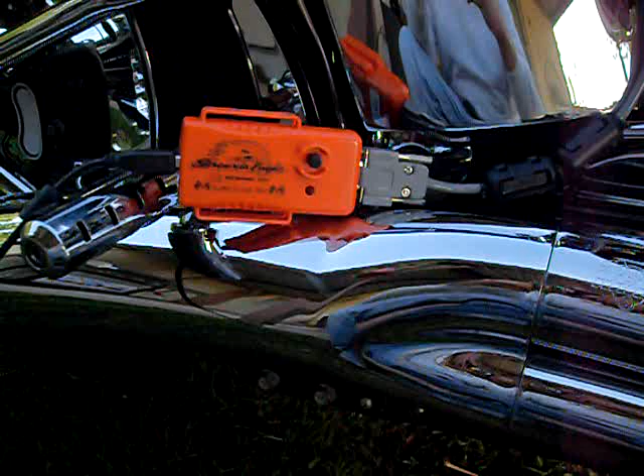Okay, I'm going to show you how to tune your Screamin Eagle Super Tuner Pro on the laptop. As you can see here, I've plugged it in under the seat, and there's a little plug right here that runs up under the seat. Just plug it in and you'll be ready to go. Then you just run it over to your laptop here.

Open up your Screamin software. Hit accept. Check for updates. And we're done. Exit. Then you want to go up here to this little icon here, setup, tuning.

Once you plug this thing into your bike, it's automatically married to your bike. So if you plan on getting another motorcycle, I wouldn't plug it in and practice with your first one, because it's a one-time, one bike only. Unlike the Power Commander, this marries to your bike.

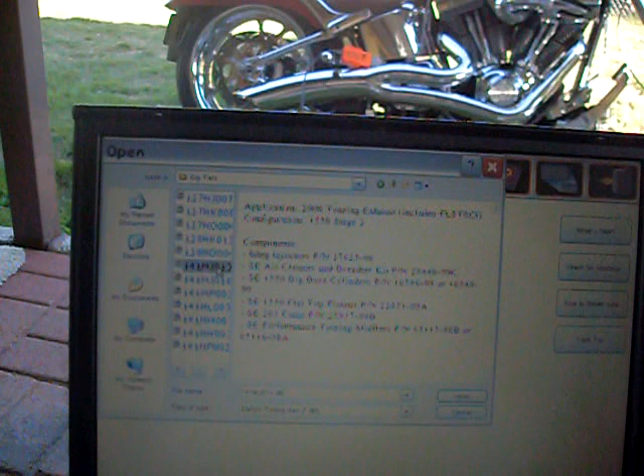And if you come in here, you'd want to go to manually select a file. That's what I had to do anyway. Go to Big Twin. I already know my year model, it's an 06 Deuce, 1550 stage 2. It doesn't have the heads. I had my heads ported, and I have 211 cams.

I couldn't find a map that was exactly what I had, so I went to the closest one I could find, which is, it'll tell you right here, this says 1550 Screamin with 6-degree injectors, 1550 big bore kit, flat top pistons, slip-on muffler. I chose the 1550

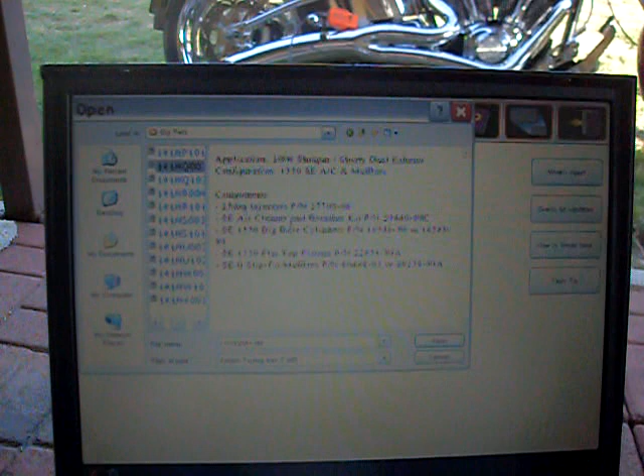25-degree injectors. If you don't know what injectors you have, you can look at the top of them and it'll have a part number. You can Google that part number and it'll tell you what degrees your injectors are. In 06 they came out with the 25-degree injectors about the 6th month. Luckily mine has them in there. I don't know if they were added later or I just got lucky.

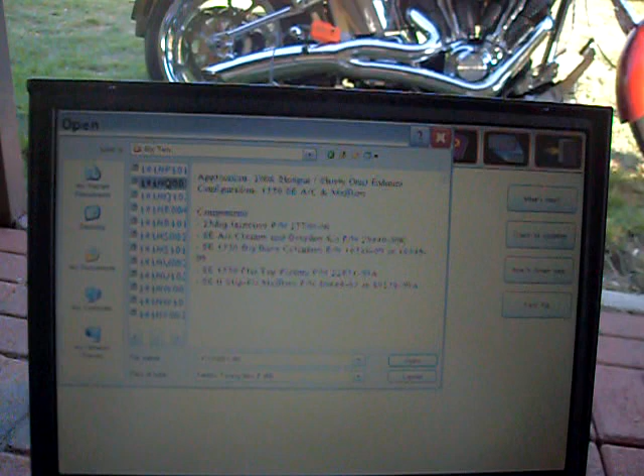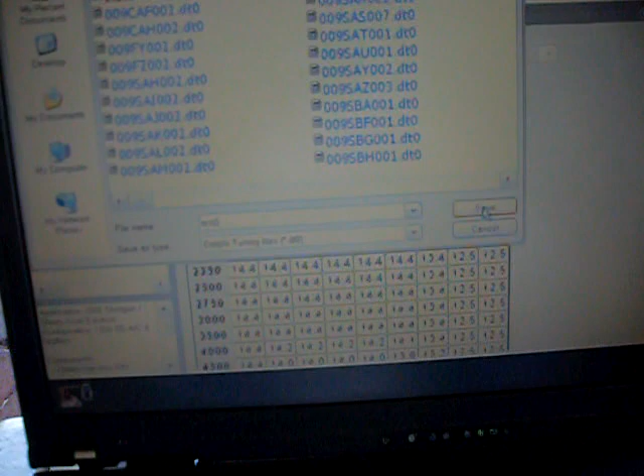So I'm going to start with this map here. Hit open. First you probably want to save it, so you don't save over the existing map. You click on the little arrows right there and it'll give you the option to save as. I'm going to name this one Test 2. I already have a test, so I'm going to do this as test 2 for the video. You hit save.

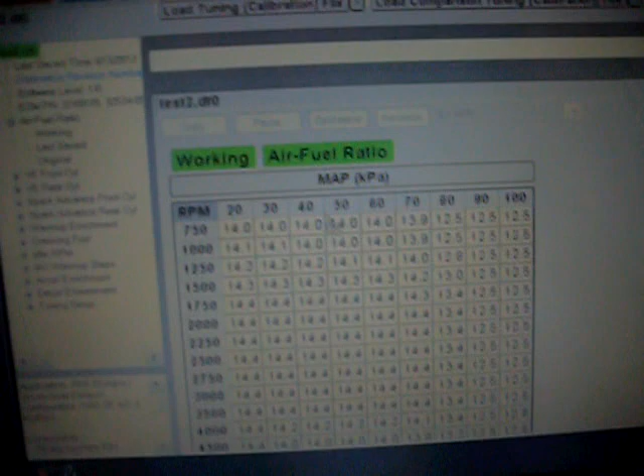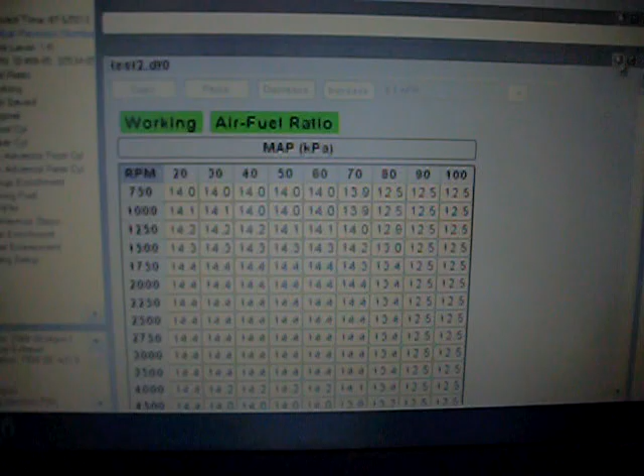Then you want to go to your air fuel ratio over here. Hit the plus. Your working is going to be the file that you're working on, which is up here now. It's called test 2. So you just left click, hold it down, and drag it over here and let your mouse button up, and it'll ask you to replace the current item with a table or with a graph. I'm going to choose a table. I'm going to expand this window so we can see it.

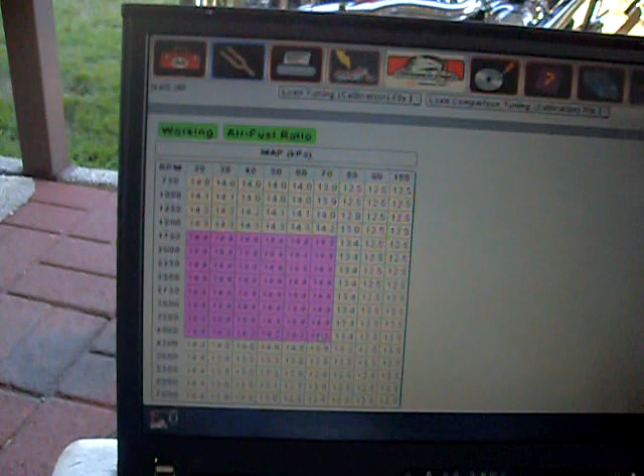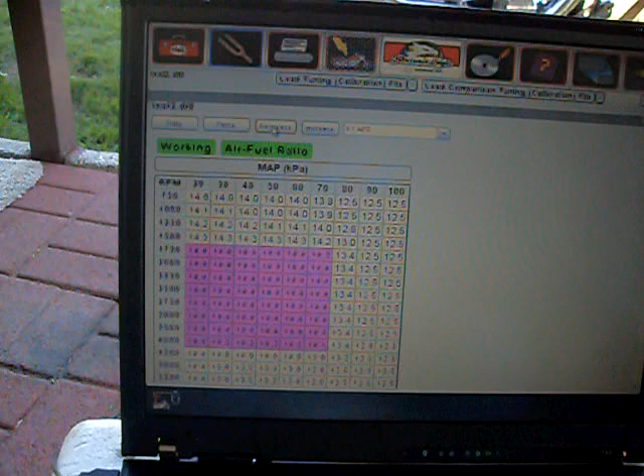To get more horsepower, you want less air and more gas. This map is showing to be kind of high in this range for air, so I'm going to select all my 14.4, 14.2 values. I want to decrease that. Right now it's giving me increments of 0.1, which is 1%, so I'm going to decrease it 5% to get around the 13.9 area. That's where you're going to get a lot of horsepower out of it. So we're going to go 1, 2, 3, 4, 5, and then click your save button, and you can exit out of this.

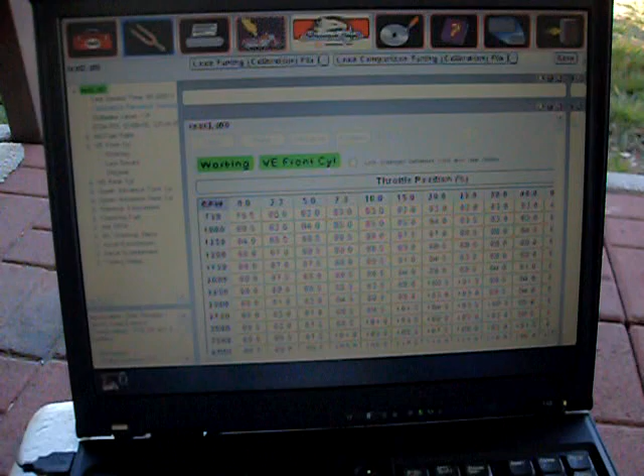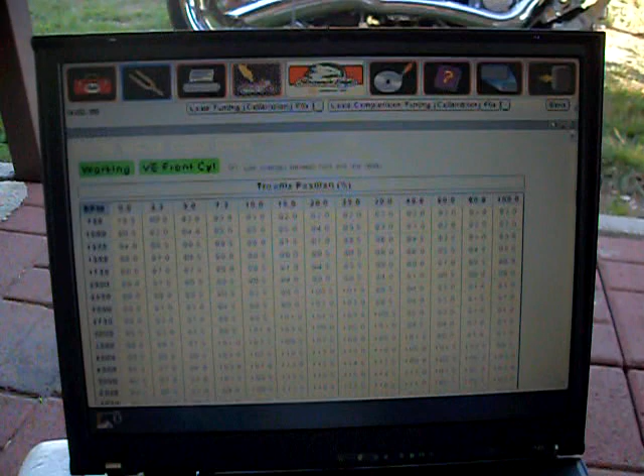Then your VE table, you do the same thing, working front cylinder, and this is going to be the amount of gas that you're giving your bike. You want to make sure you click on link changes between front and rear tables. That way changes you make here are going to be done to the rear cylinder. You don't want to change anything on the front that you don't do to the back, so they're running the same. And this shows your throttle position up here, 0 to 100% throttle position, and then your RPMs are over here.

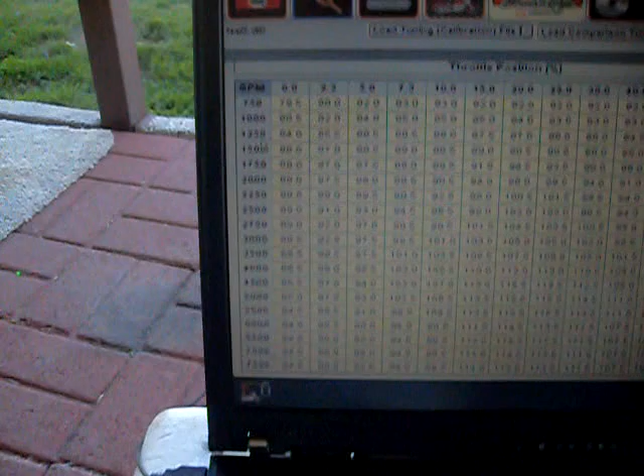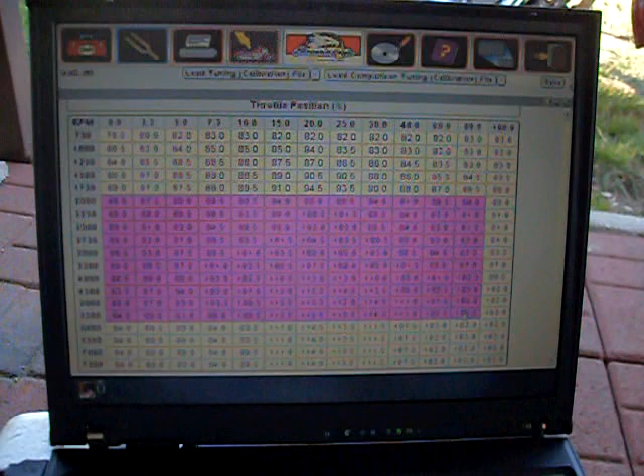Usually if I'm getting on it, I want to have a fast bike, I want to go in here and from about 2,000 RPMs to about 5,500, I just want to increase all this fuel area a little bit. I'm going to increase it 2%. It's at 0.5% right now, so let's go 1, 2, 3, 4.

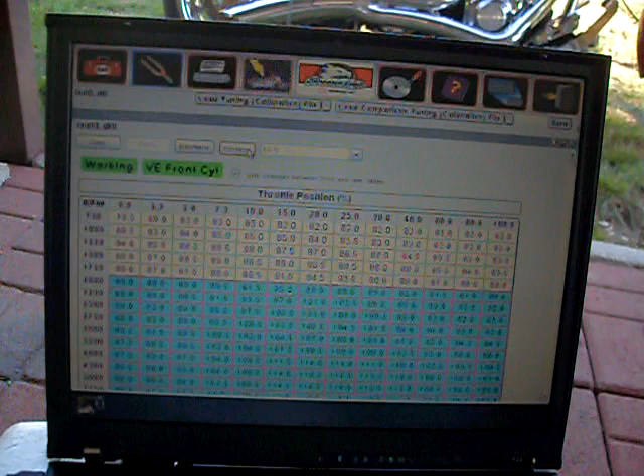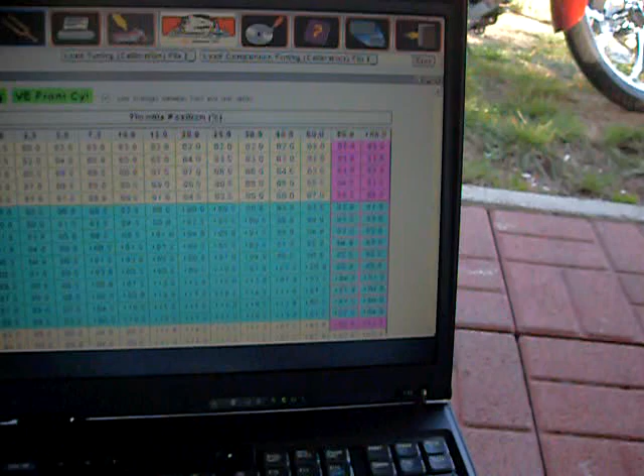And then I want to increase these two areas right here, the 80 to 100, all the way to 55. My rev limit's set at 6,200, but I don't ever hit the rev limit. I'm going to go ahead and increase these areas a little bit as well, so I'm going to go 1, 2, 3, 4, and that's going to give me more fuel at 80 to 100% open throttle. If I'm at that area, I know that I'm wanting more fuel.

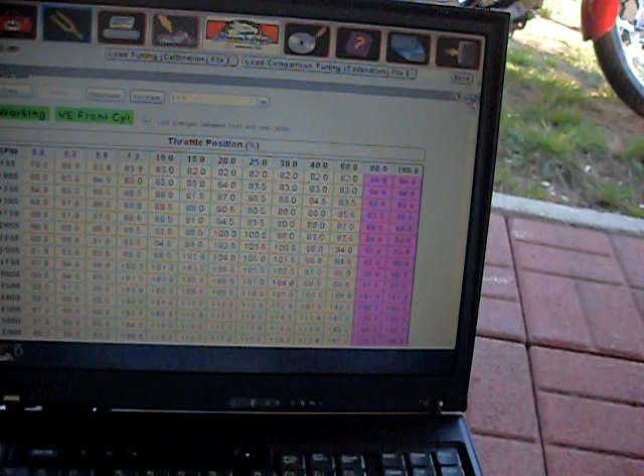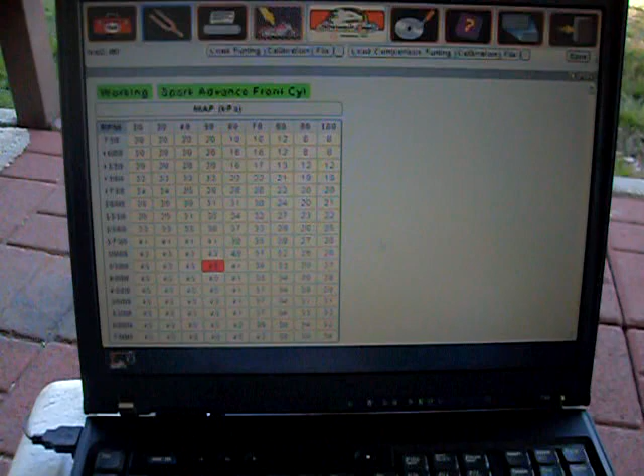So now we can save that file. That's automatically being saved in the test 2. So we know that the front and rear have already been done. Let's go to the Spark Advance. Working. This is going to change your timing. You can play around and find out what works best for you and your bike.

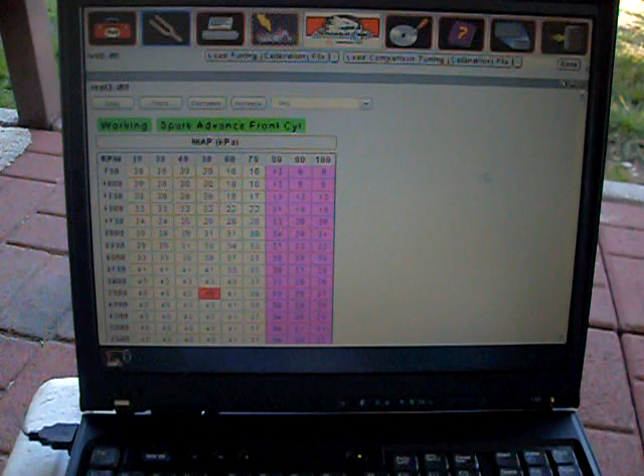Every bike is different, so you just need to change the settings in one area, save it, go do a test run, come back and go back to the original map, or change these back. Just remember what you changed, and if it doesn't work, then you can always go back and change it back if you go too far, and vice versa. So I'm going to decrease the timing 3 degrees. 1, 2, 3. Click save.

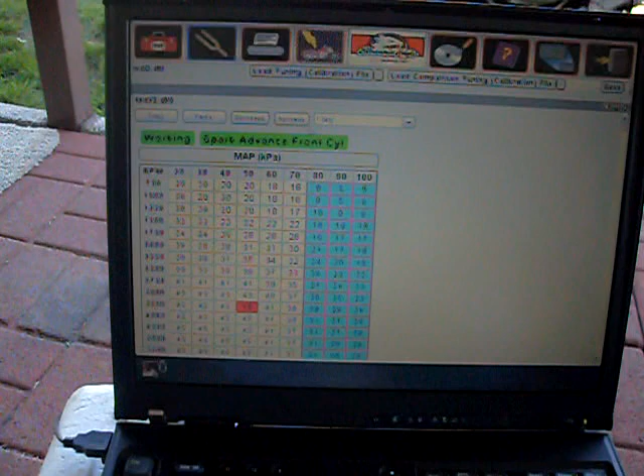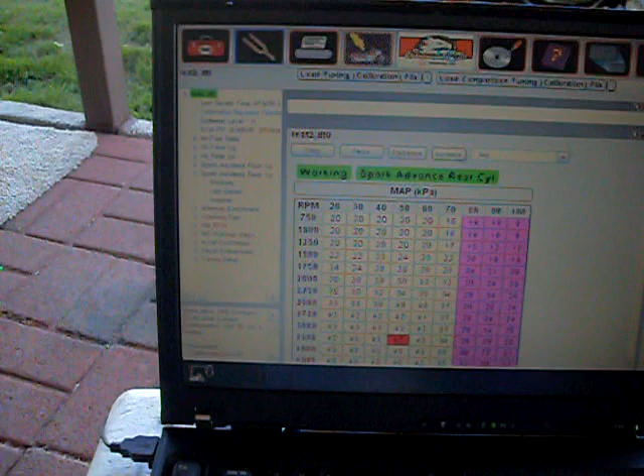Now that was my front cylinder, so I'm going to have to go to the rear cylinder and do the same thing. So let's grab these two areas. We're going to decrease these 3 degrees. Click save.

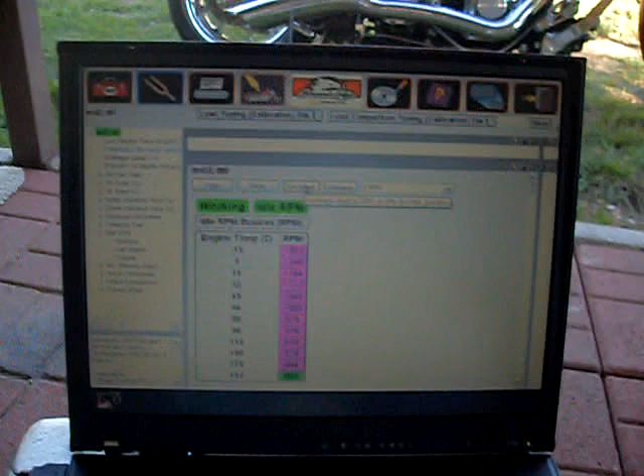Idling. You can change your idle speed right here. This is going to change basically your RPMs while you're idling. I want to decrease this about 20 to 30 RPMs less, so it gives it a nice lope. So I'm going to hit that 3, 4, save.

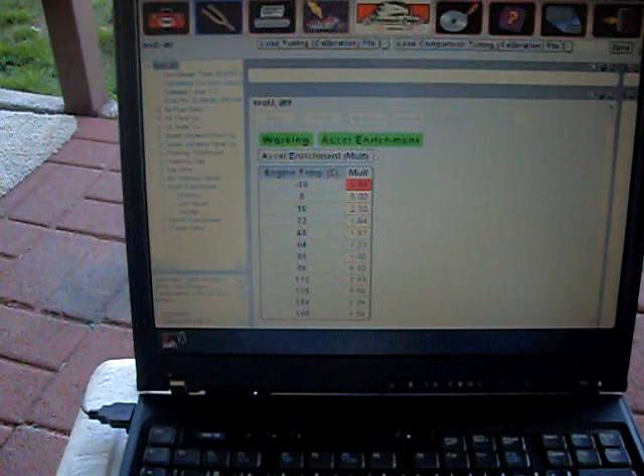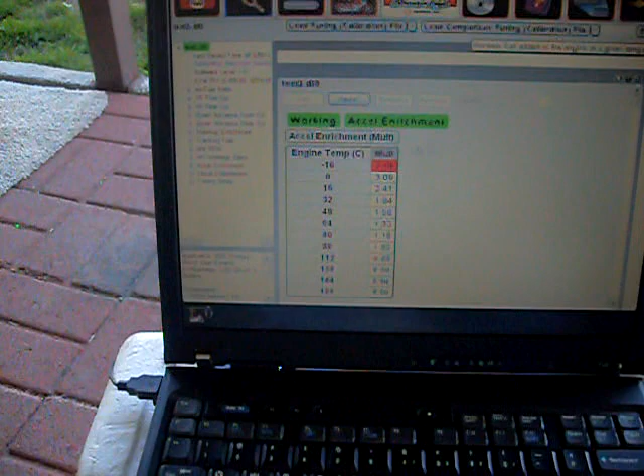X that out. Your accel enrichment, this is going to tell you how much gas you dump in when you mash the gas. So I want to increase all these, probably do about 5 increments of 0.02, which is 1, 2, 3, 4, 5. That's going to shoot gas into those cylinders whenever I mash the gas, and you want to have that for sure.

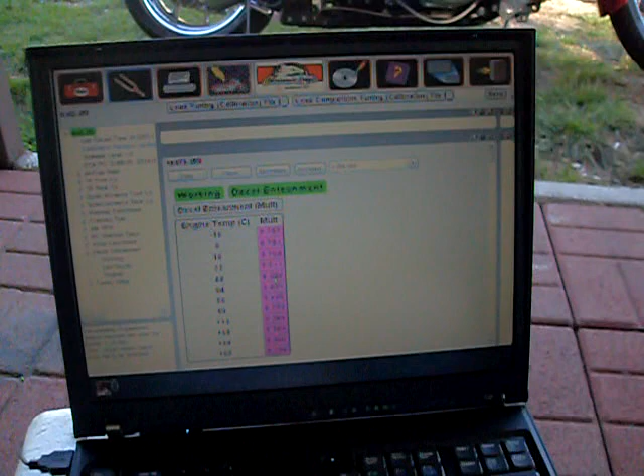And then my decel, it's going to be the exact opposite here. You're going to increase it to have less fuel when you let off the gas. So if you're getting some popping and stuff when you let off the gas, you probably want to come in here and increase these values to allow for less gas while you're decelling. So let's increase these by 3. 1, 2, 3. Click save.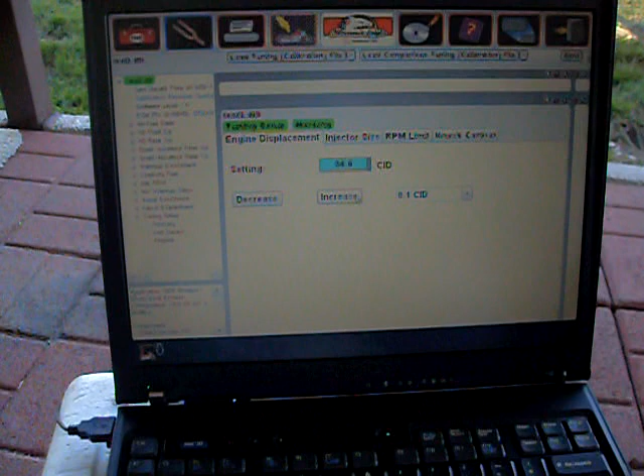Now you want to go to your tuning setup. Go to working. Right now it's showing my setting as a 94.6, which is wrong. I have a 95, so I want to change that to 95. My RPM limit, you can change that to whatever you want. 6200 is plenty for me right now, so I'm going to stay there. Turn your knock control on, it just helps to have that.

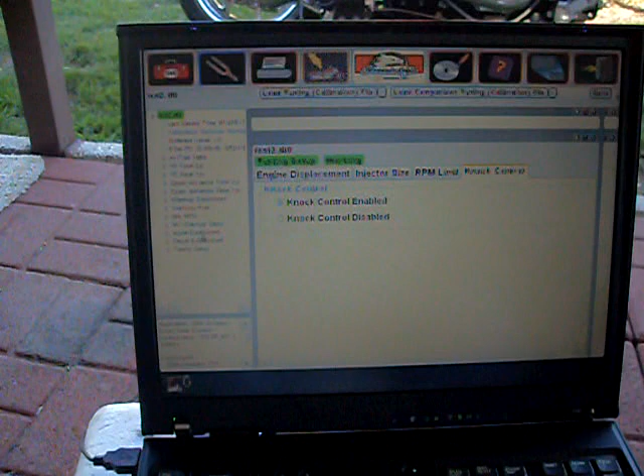So right now what we've done is we've come in here and we've changed our decel and accel enrichment. We've changed our idling. We've changed our timing. We've changed how much fuel we're getting per front and rear cylinder. And we've changed our air-fuel ratio. So now it's time to load this information into the bike.

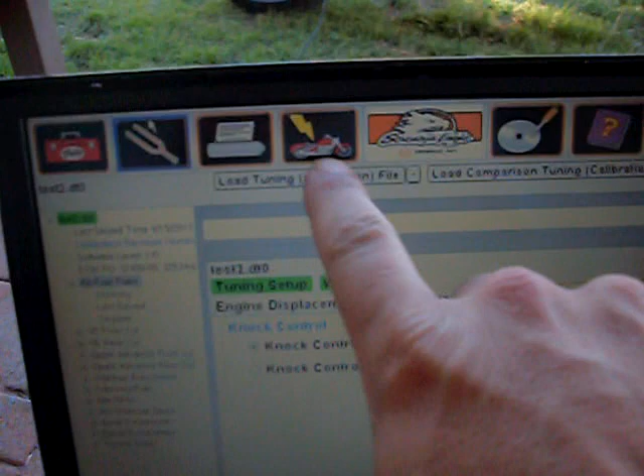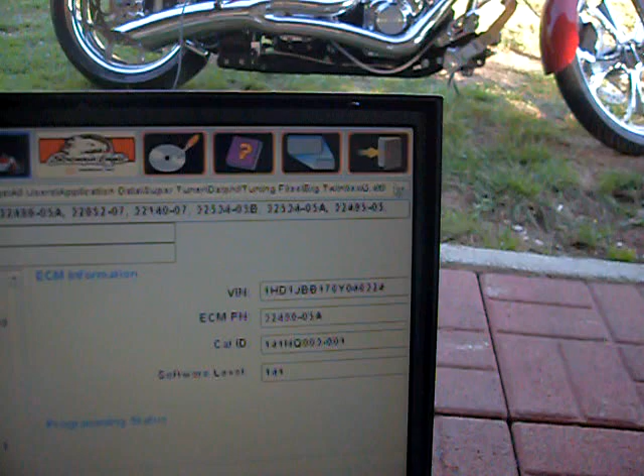So you come over and turn the key on. Then that little icon right there, the mask will be taken off of it, so to speak. And right here it's just giving you this real long name, but at the end of it you can see it says test 2. That's the one I've just been working on. You can use your drop down arrow to get a better idea. If you're not sure, you can select it again down here.

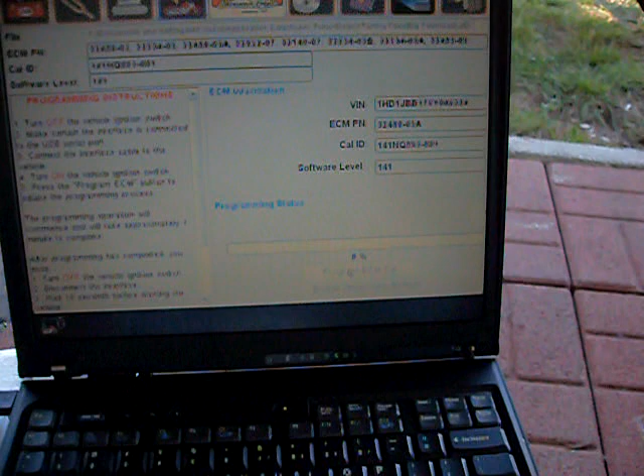And then you want to hit program ECM. What it's doing is sending it to the computer right now. You can actually hear it changing in there. You can see it's calibrating the vehicle.

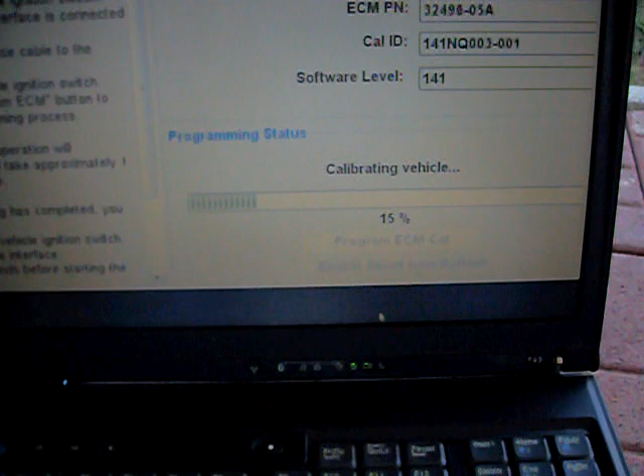Once you've done this, you turn the bike off, unplug your Screamin' Eagle, wait 10 seconds, turn it on, your blinker should flash 4 times or twice, and then you're ready to ride.